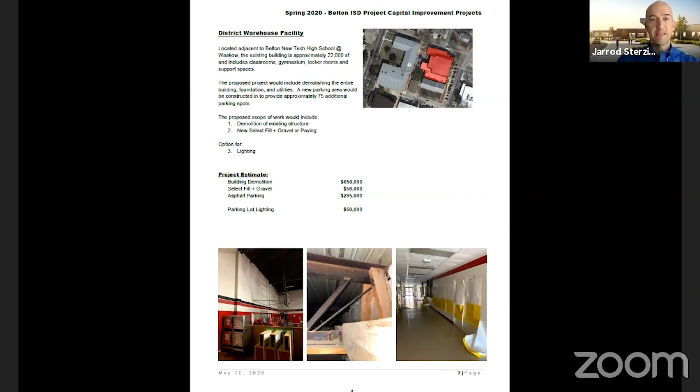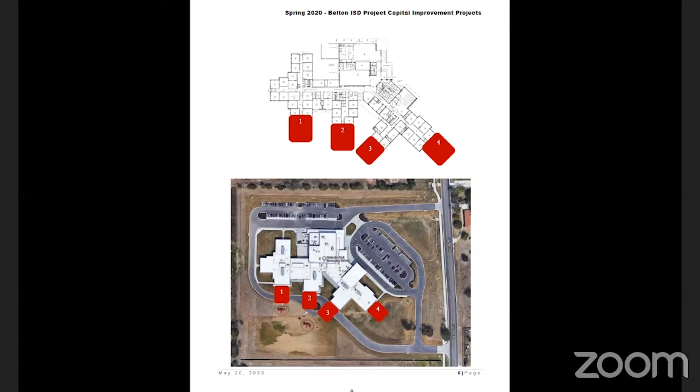Good. Okay, thanks David.

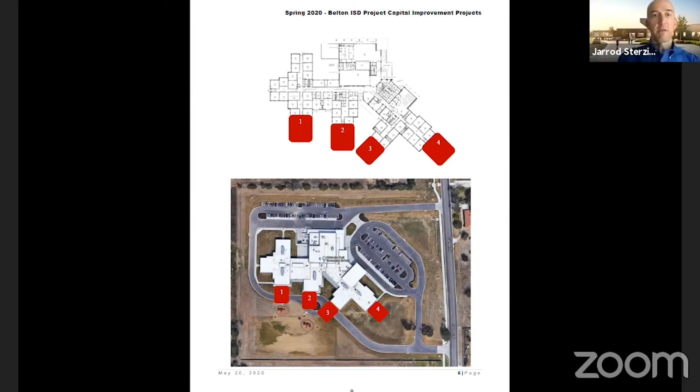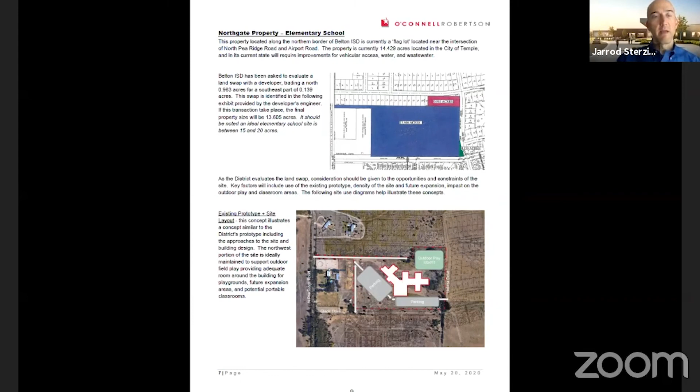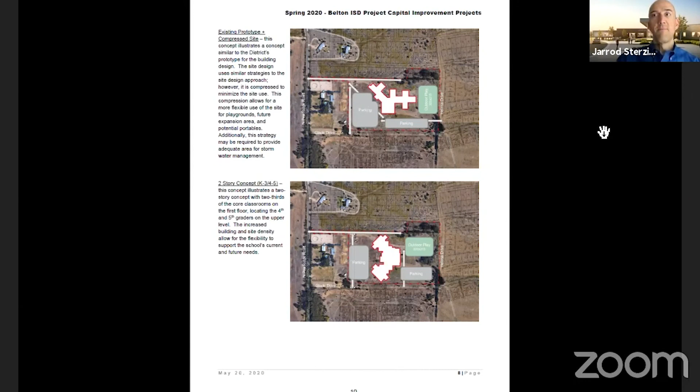On the next page there are 2 additional examples representing either a more condensed configuration in a single-story concept, or at the bottom a 2-story concept, which gets into the split of grade levels. The next page indicates an even denser 2-story concept where grade levels are literally split half up, half down in this scenario.

So there are strategies where the site could be workable with or without that property, and the district was looking toward a 2-story concept. At the last facilities committee meeting, there was discussion about touring those projects to see what that looks and feels like, different from the Charter Oak prototype.

Jarrod, if I could add real quick, I want to be clear for everyone on this Zoom call today, and also for the public, that there have been no decisions made to build a building there.

This is simply a talk about what has been asked of us regarding the land, and the facilities committee was discussing the land use, but we do not have a plan to build a facility here at this time.

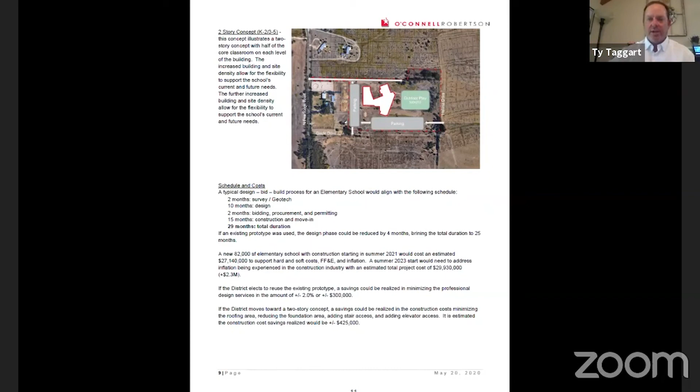Matt, I've got a question on that also. I think Dr. Battershell worked this scenario pretty hard with the local developer, and it seemed like we worked it for about 3 months. You did a lot of local consulting with Ms. Covington and different experts in the area, and it seemed as though we were right at the precipice of making a decision, or maybe bringing this to the board for a decision. Then you know what happened. So where are we in the decision-making process of yay or nay on allowing that land swap to happen?

We had a meeting a couple of weeks ago with legal counsel, Robert and myself, talking through some of these things that have already been discussed. We will be having an update for y'all coming forward, probably in the next month or so. One of the reasons I wanted Jarrod to go through all of these is I felt like we had a lot of loose ends, so we wanted to go over all the projects and then start tying up the loose ends as we move forward. Thanks.

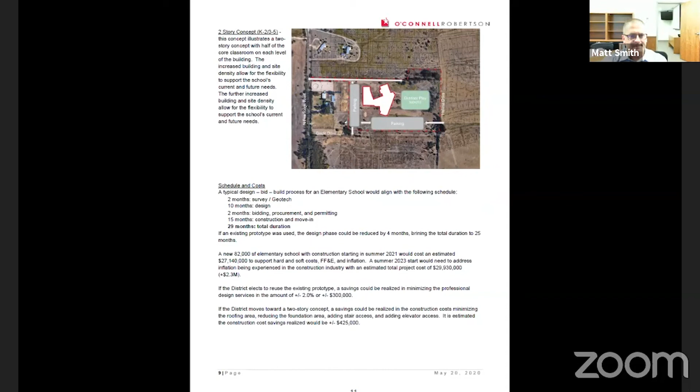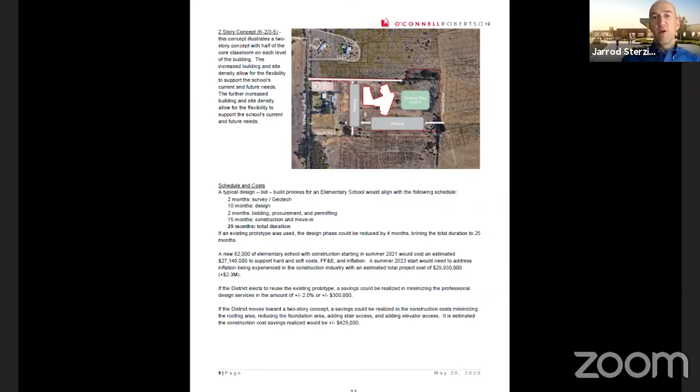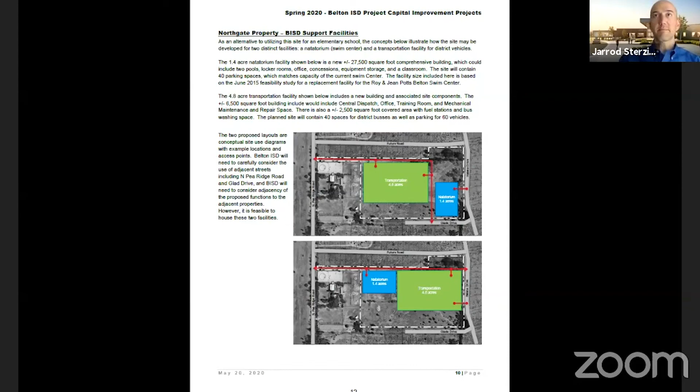So then the next feasibility study element is that initial pass, and there's a lot of information here about Southwest Elementary School. It was asked of us: is it feasible to rebuild Southwest Elementary School on site? I'll hit the highlights: the existing building is about 60,000 square feet, supporting around 400 students right now. The site is only 9 acres, and when we talk about a new elementary school site, we usually talk about 15 acres. So we need to consider that as we move forward in the impact of phasing and construction. A new facility, we've generally been heading in the 80,000 square foot range, about 82,000 square feet, and 1 story.

As you go to the next page, these diagrams start to show the end condition of what this could look like. You'll see the existing site plan at the top. In the middle is what would happen if you took Charter Oak and placed it on the site. The last one uses that dense 2-story concept where students are half up, half down, showing what that land use looks like. So in all the schemes right now, there is impact to the existing facilities in the way these are shown.

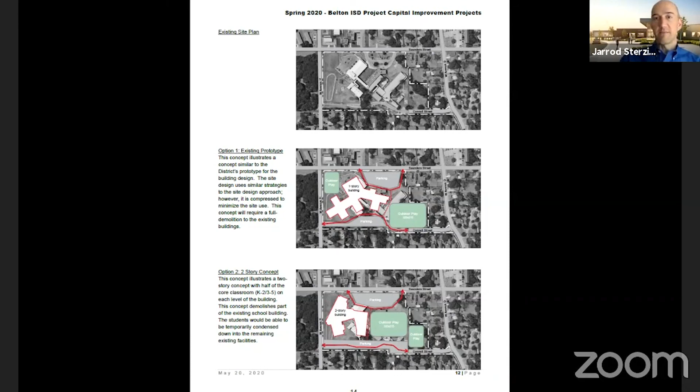So then if you'll go to the next page. So those projects, really everything before, are things that we saw at the last facilities committee meeting, or picked up from the previous evaluation of the Northgate site, and then here on the Southwest Elementary School site. And so the projects here from page 13 of the PDF on to the end are projects that we've pulled forward from the 2018 facility assessment. Right now we've not delved deep into these since that time.

So the first one here is career and technical education. In 2018, we had the opportunity to update our study. That was what ultimately gave the auto tech facility at Belton High School. We had the opportunity then to meet with Stephanie, but we have not had that opportunity at this point to meet with her. So I included this information kind of moving forward.

And I would say the summary at that time were the 3 points at the bottom: starting to align enrollment and strong workforce demand, that there's a parallel from beginning to end. There was a goal to bring CTE pathways together. At the time, the biomedical program was actually taught on 6th Street, so that has been pulled over to Belton High School. And then that last one, which would be the key right now, is the impact of Lake Belton High School, of students being pulled off the Belton High School campus and being able to transition to Lake Belton High School. What does that start looking like literally for this fall?

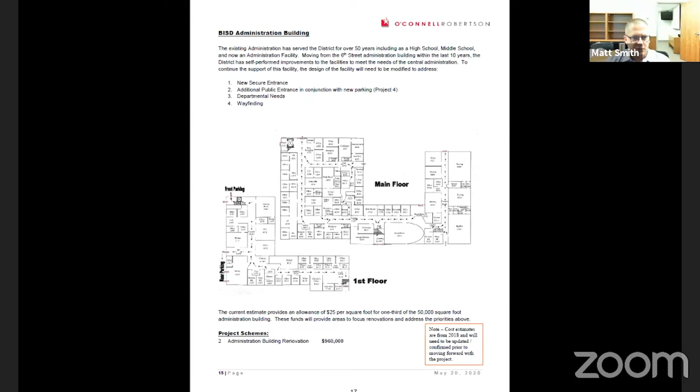The next one is the Belton High School baseball softball field. This was, I'll say, a wish list that was generated shortly after Tiger Stadium was improved with the field—providing artificial turf at the baseball softball field.

We had generated multiple options here, from the infield only, to the outfield only, or the entire turf. This is kind of coming back up as we look at Lake Belton High School, since they have artificial turf throughout their competition fields.

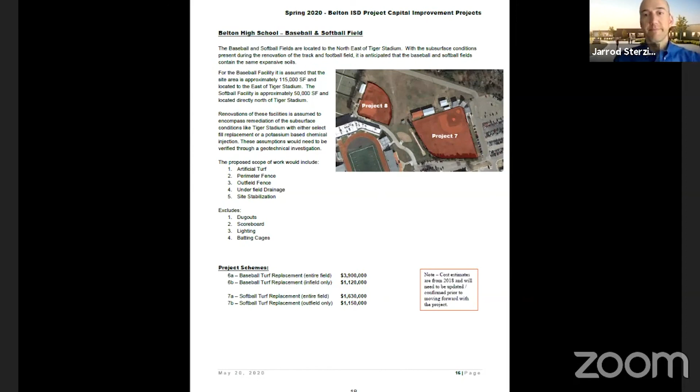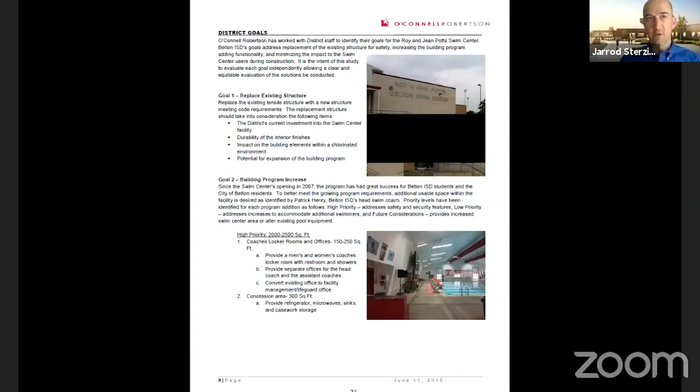And then on the next page, you'll see there's a ranking of those spaces. And then finally, the third one was the duration, construction duration. From a simple standpoint, the simplest, most economical solution almost takes the pool offline for almost an entire year. So that became a challenge for the swim season, which is pretty much a year-round sport. There's always something kind of going on with swim. So how to do that.

The subsequent pages from page 12 through the end go through and explore the various options to address the structure, the program. Do you build a second pool? Do you put additional amenities like a dive well? Those type of elements moving forward. And there was a preferred option by the district - as I recall, it was option 1C, which was roughly about $3 to $4 million at the time. Our goals, if this becomes a priority, would go back and confirm those assumptions, confirm the ideal solution, and then ultimately refresh this price and study moving forward.

So Jarrod, I've got a question on this one. I don't know of another program that really services more people in our area than our swim, because of the things that you brought in, the youth and the seniors. And then I think because of the facility that we have right now, we don't even have JV, the sub-varsity swimming coming up for this next season. So this seems to me to be a priority area for us.